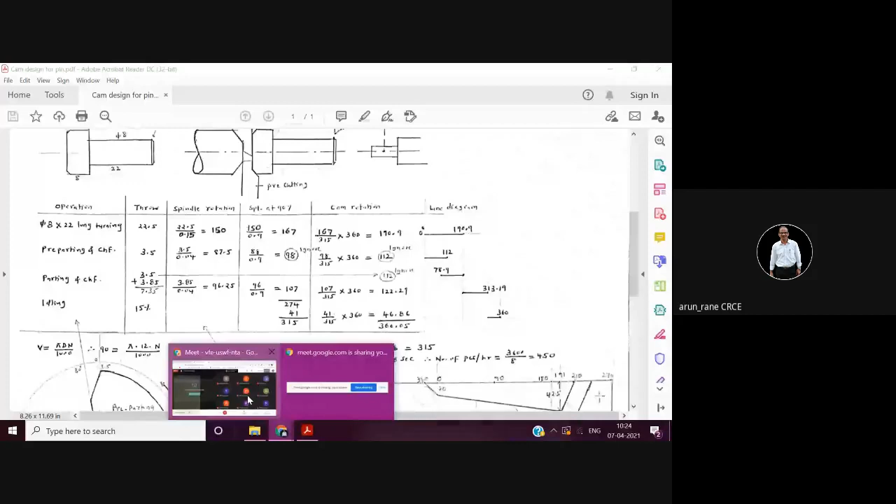So let us start at 0 degree. That is the central camshaft. It gives drive to the tailstock, and then from the central camshaft, the drive goes to the front vertical slide, front cross slide, rear vertical slide and rear cross slide. Yesterday I showed you this diagram. From the central camshaft, the drive goes to this and this. There are disc cams connected for this radial movement, a cylindrical cam for this longitudinal movement, and again two more cylindrical cams for this movement - that is the longitudinal movement of the front cross slide and the rear cross slide.

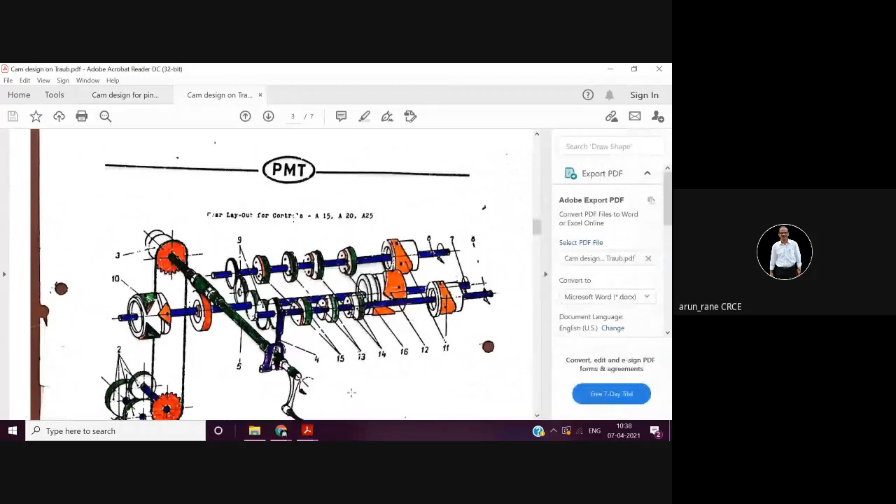Then we have to consider the efficiency - 90% efficiency - because there are so many sprockets etc., so there will be some losses, say 10%. So if you consider 90% efficiency, what will be the rotations required? Obviously more, isn't it? So it will be 150 divided by 0.9, which is equal to 167.

90% of 167 is nothing but 150, isn't it? Because there are losses. That's why at 90% efficiency, my RPM should be more - 167.

Now look at this carefully - how to calculate this cam rotation. For calculating cam rotation, you have to first calculate the total spindle rotations. And what is our assumption? That all the spindle rotations should happen in one revolution of the camshaft, that is in 360-degree rotation of the camshaft.

Now here, total number of revolutions required is 315. I'll tell you how. Total number of spindle rotations required to complete this workpiece is 315. This means that for 315 spindle rotations, the camshaft should rotate through one revolution, that is 360 degrees.

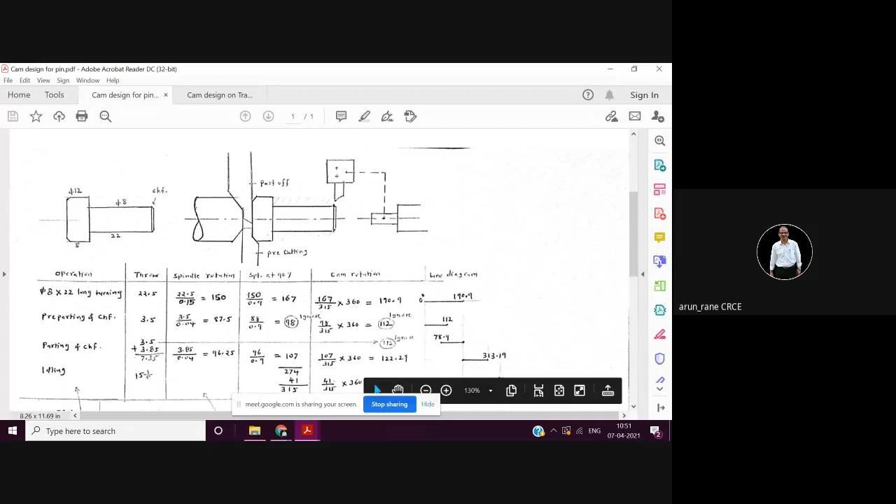Okay, so now let us find out the rotations. Now here for 3.5 millimeter of the movement, the feed rate is same, that is 0.04. So for 3.5, here we are finding out the rotations for this and this road.

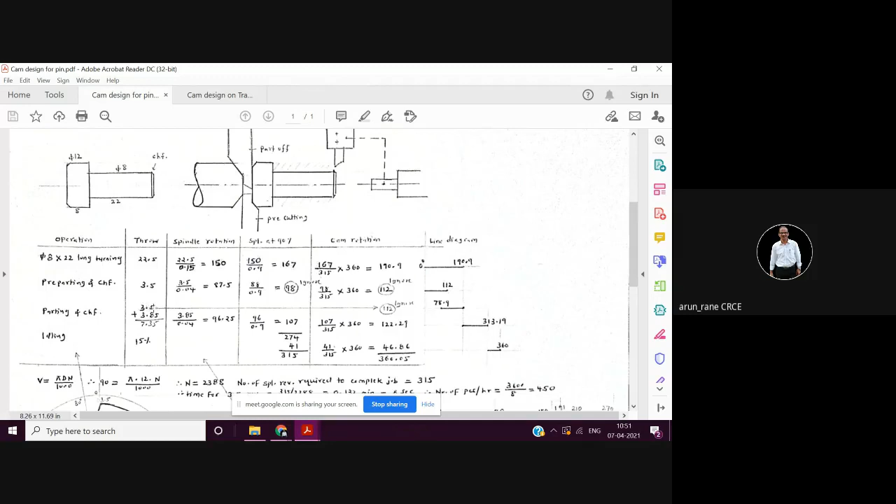Now why is it divided into two parts? Because we are ensuring that by the time this tool comes here, we have to see that the parting tool has come till 6 mm, that is, the parting tool has traveled 3.5 mm. So for 3.5, the number of rotations will be 112.

That is exactly the same. Now this is going to be a bonus for me. Why? Because this is happening along with this, so I have to ignore it. Correct, I have to ignore it.

Now how do I calculate this 78.9? It is simple - this 190.9, from that you have to subtract 112.

So you will get 78.9. You have to start this tool exactly when the camshaft rotates at 78.9. I hope this is clear. This is what you have to understand.

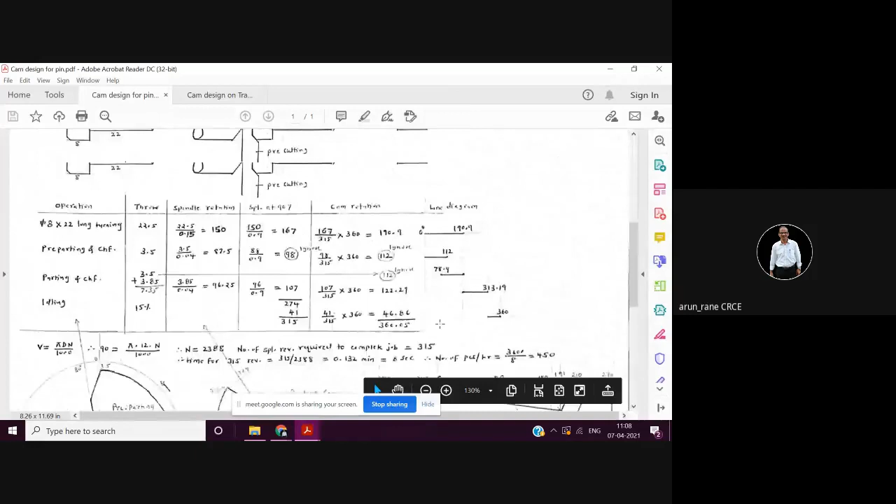I hope you have understood this. So if you have any doubt, you please ask.

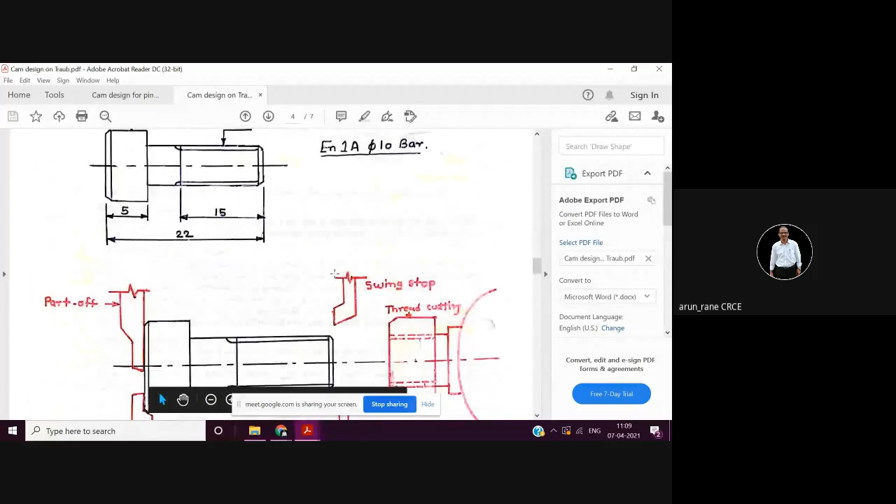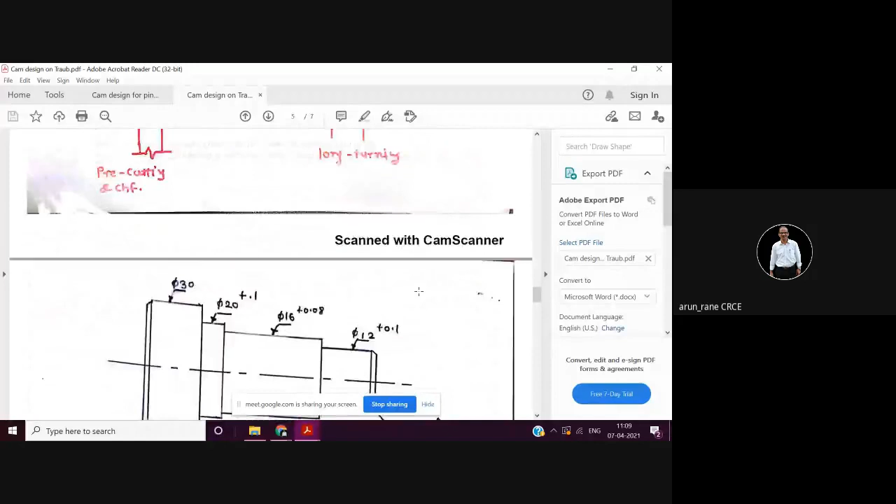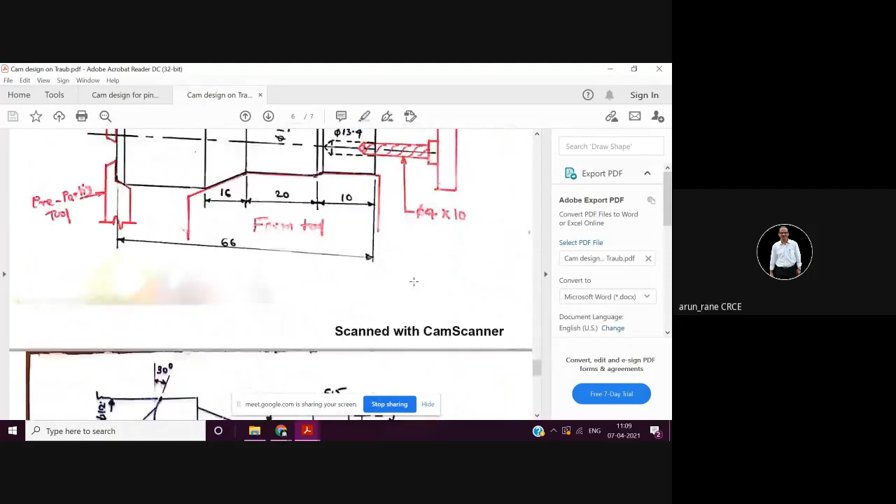So you can take the component for this assignment from this. You can have any component you can take. For threading also same logic, and almost 50% solution is given to this. So any component for this assignment, that is cam design, you can take any component from this. All the components, the tool layout is already shown. Only you have to prepare the table and you have to make the cams. So any component, it's up to you. I already uploaded this.

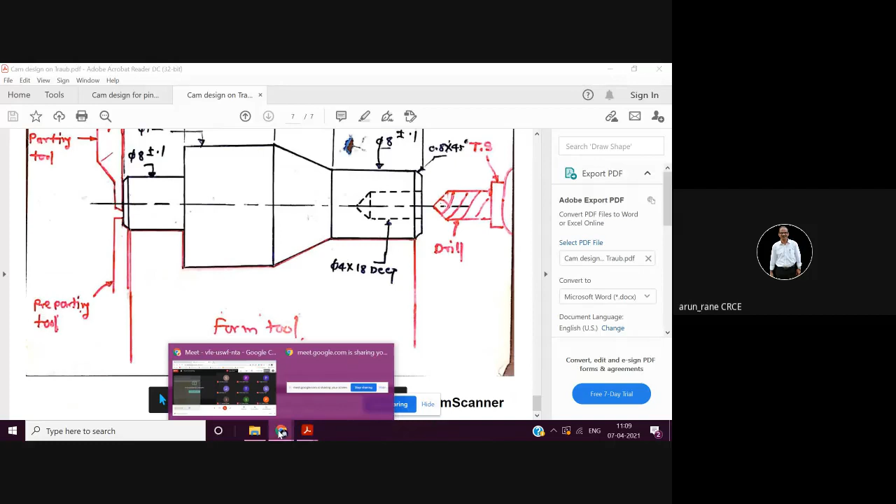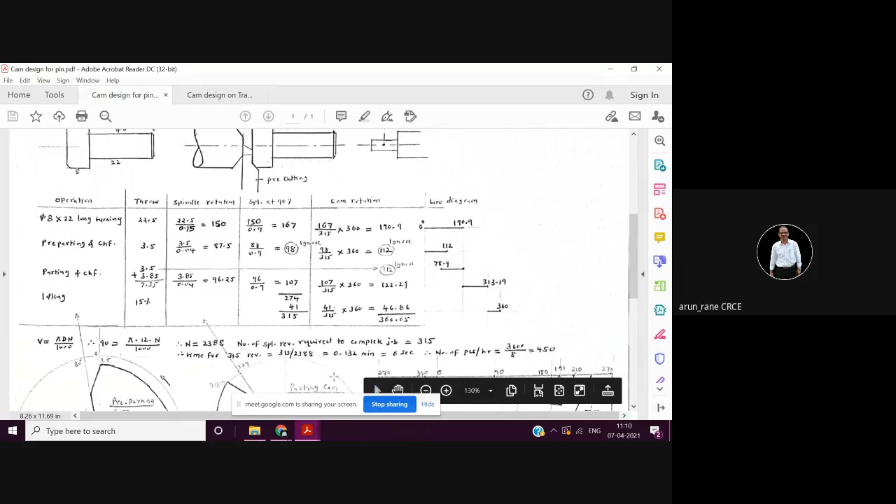So in this component, this drawing is there. Tool layout is also shown. Okay, now operation sequence is also clear. So only you have to prepare this table. Then you have to calculate the production rate, and then you have to design the cam. Okay, theek hai. Thank you so much.